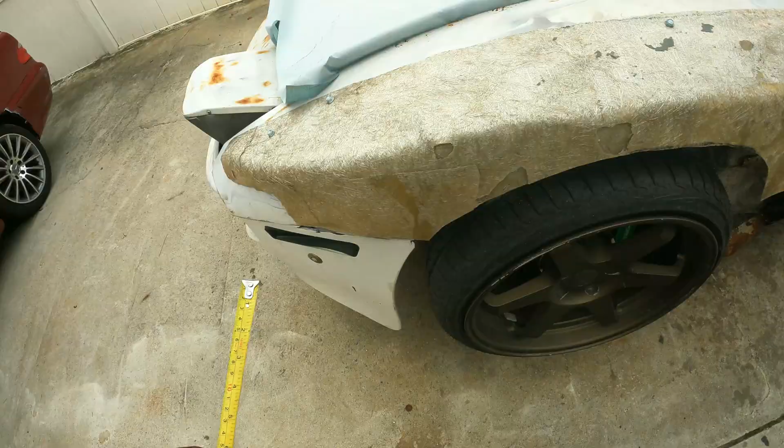My body kit more or less goes along with the dimensions of the car. Gotta find a piece where I can bounce off of here, but it's more or less not too wide. Okay, here we go - it's about 2 inches off from the body.

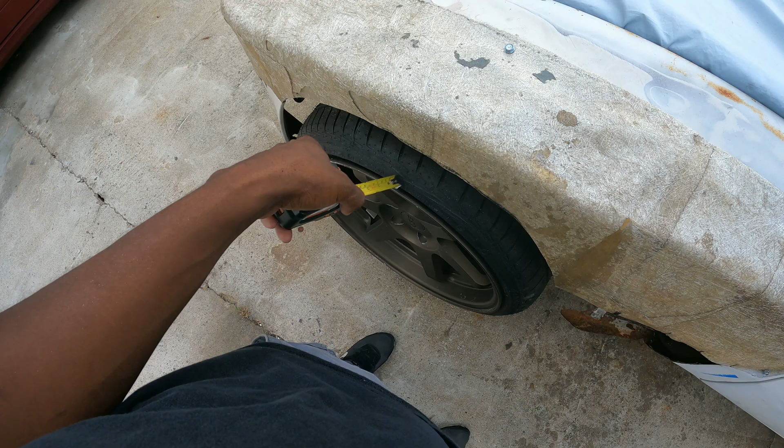Now that I know that, this is basically the distance of how far the wheel pokes out. I want to make the wheel super flush, so we're going to measure how much farther it needs to go out - about another 3/4 of an inch. So 2 3/4 - 2 inches here, 2 3/4 here, and then we'll swoop it back.

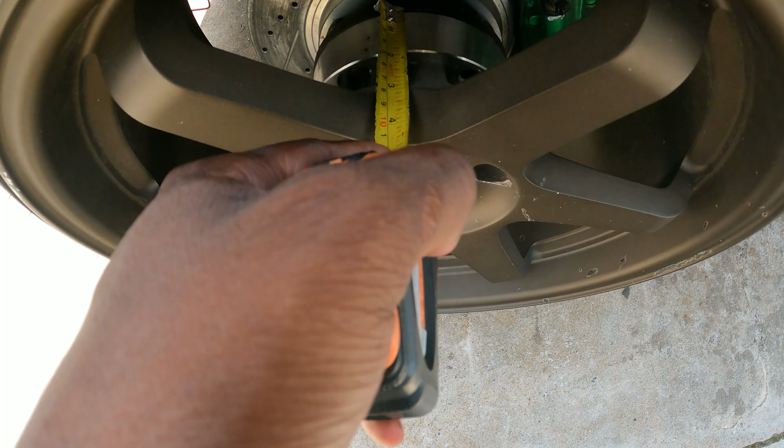Whatever that is, that doesn't matter. As you can see, we have a 1.5 inch spacer to get what we want with this wide body kit, and that's about all the measurements we need. Let's go ahead and take these measurements and throw them on the computer.

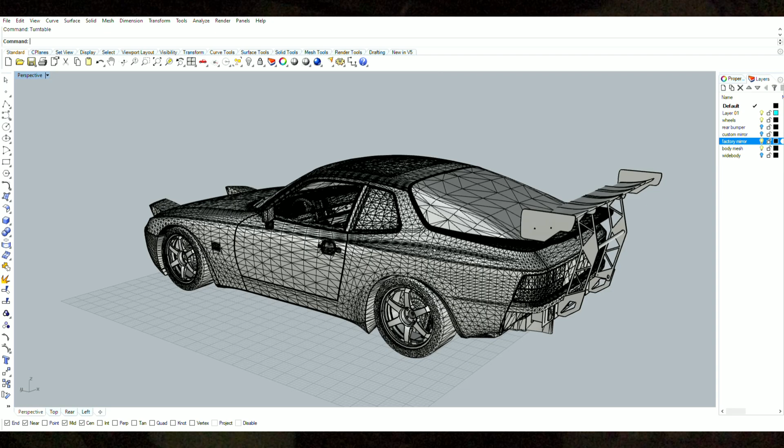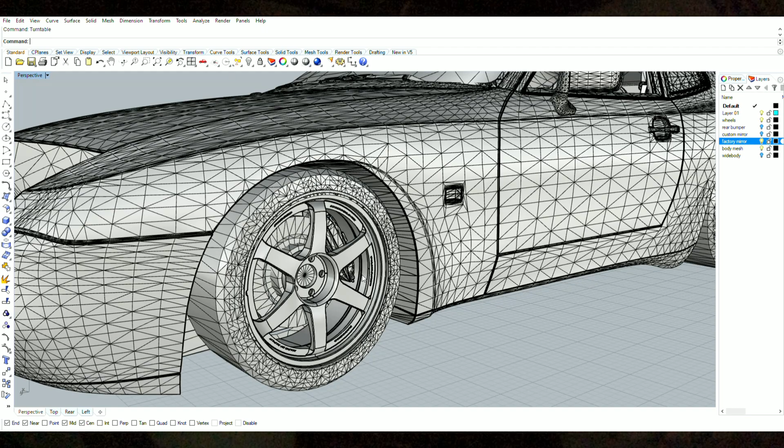All right guys, so we are here in my own little fantasy world. This is my 944 that I created on Rhinoceros 5. If you guys know about Rhinoceros, it's a pretty cool, very abstract 3D design software that allows you to do whatever you want. You can see this is my fantasy 944, all the way up to equipped with the TE37s here.

Everything was basically downloaded offline and I just went ham with it. Eventually I'll get a 3D scanner and start doing a bunch of other stuff, but for now all this stuff is just what we found online.

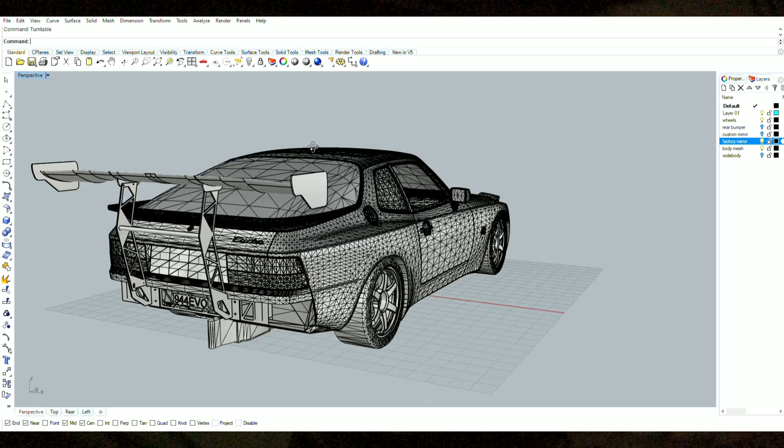So you can see we have a bunch of things that will eventually go on the 944. Like eventually we'll get real TEs. This is my rear bumper design, made it a long while ago. Kind of sticks the tranny out to symbolize what we're doing with that, but I'll eventually fix that. You can see we kind of touched the interior here.

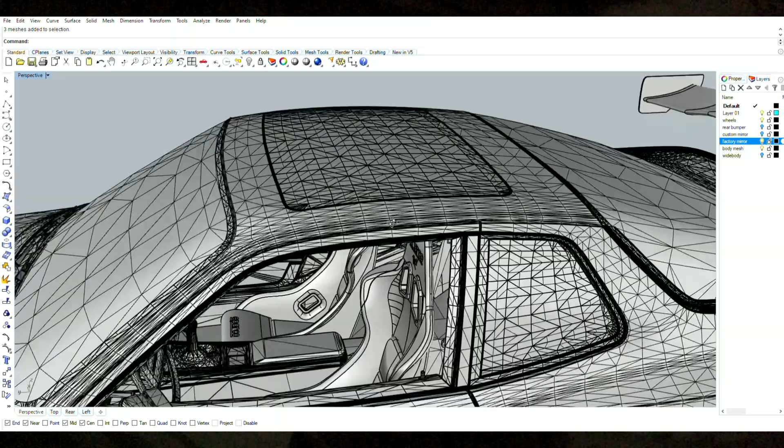Look at this, this thing is cool, guys. Now you can actually see why I wanted to design everything in 3D - it's actually super simple. I really like this kind of stuff.

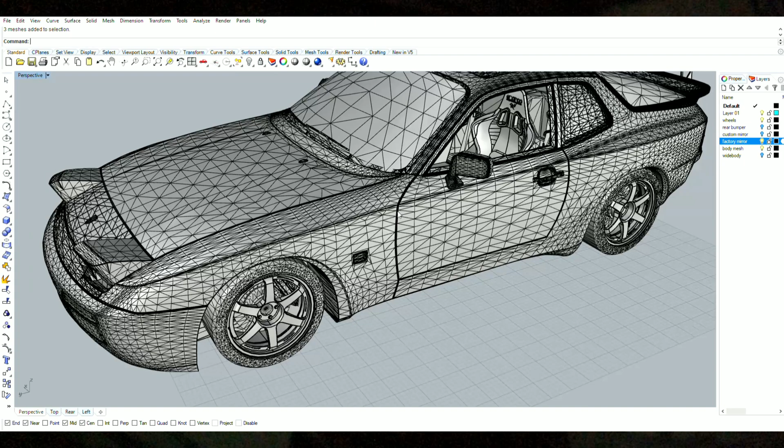So let's go ahead and jump right into it. As you can see, we can actually divide this car up into several pieces. You see, that's the mirror.

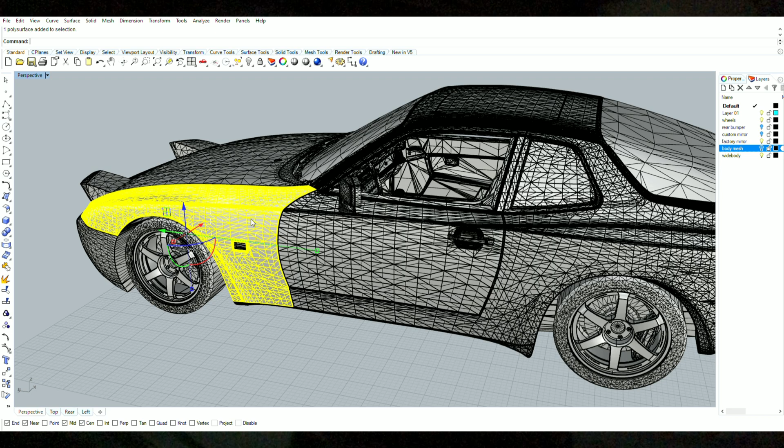Let's go ahead and turn on the wide body. We can turn off the body mesh, and now by turning off the body mesh we can separate these things into separate pieces. This actually helps us out a lot in terms of designing - now we can trim, cut, add, subtract, everything super simply.

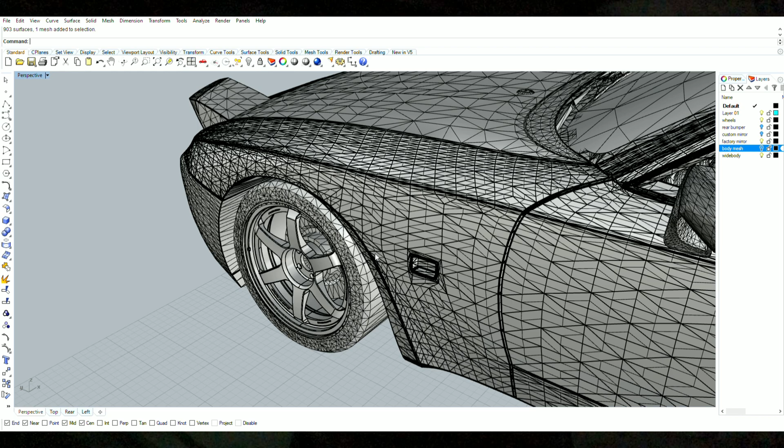The length may not be proper, the width might not be proper, but everything was scaled uniformly, so hopefully we're just going to go off of that. If anything, I'll take more measurements, and after we 3D print the wide body, we'll definitely be able to see if it fits or not.

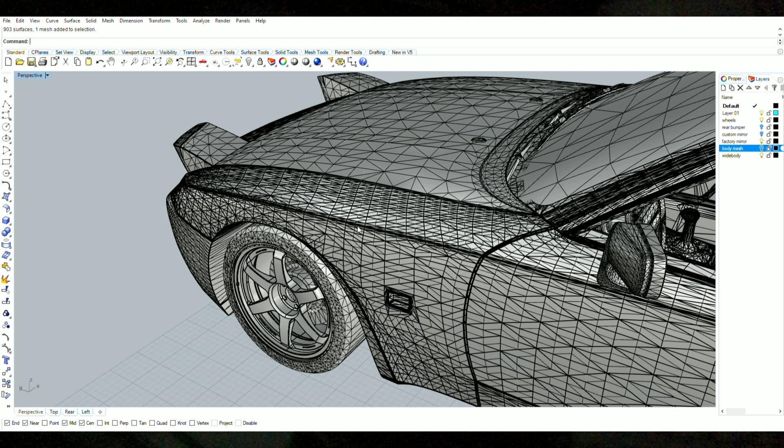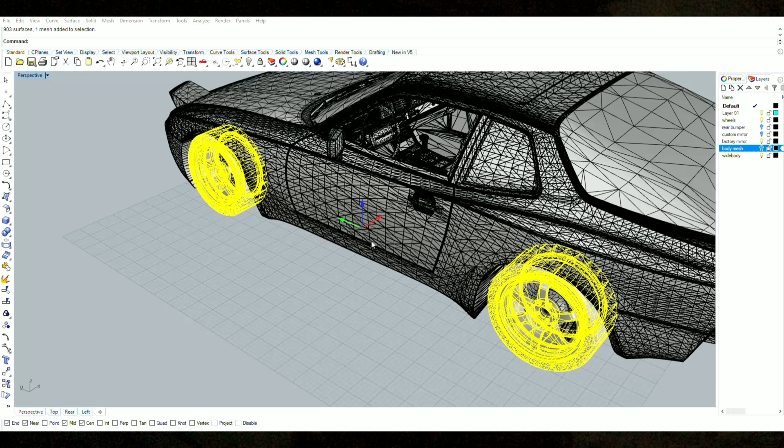That being said, we have 1.5 inch spacers on our TE37s, so let's go ahead and grab both of them and minus them 1.5 of an inch, and that gives us our little poke.

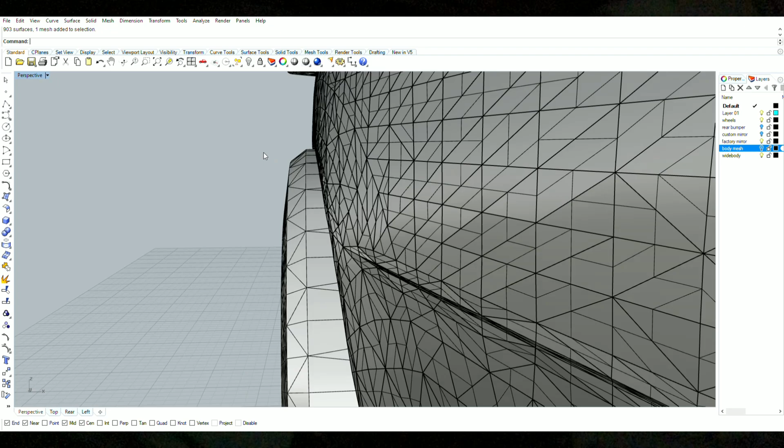Now, if you guys remember, probably like a year ago when I made my first video of slamming this car on my yellow speed coilovers, that's about how it looked on my 10.5 inch rim on the back with, I think it's 265 tires here.

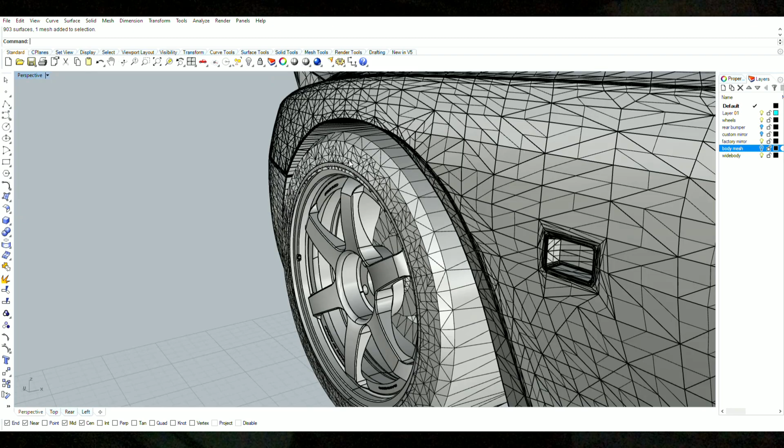Alright guys, now we can get to the styling of the body kit now that the measurements are all done.

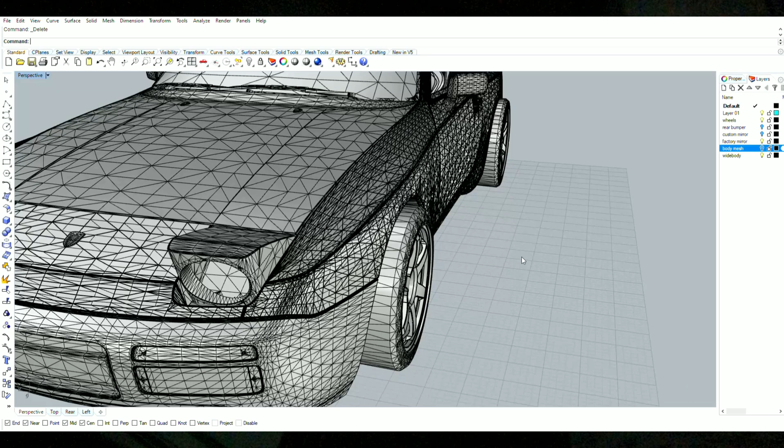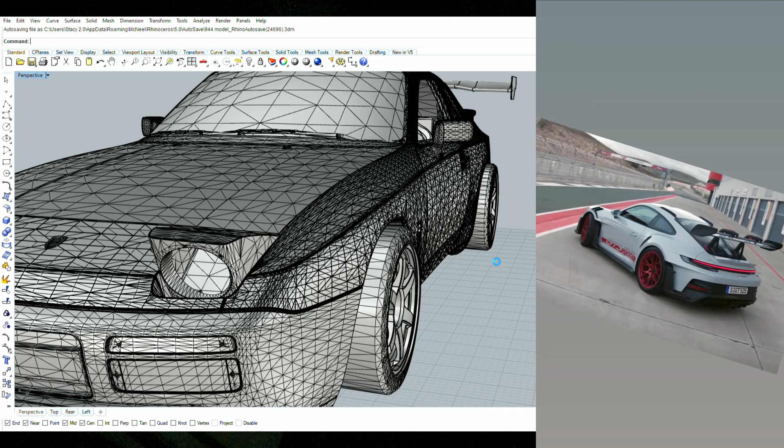For starters, I guess we can say my inspiration will definitely come from Porsche themselves. If you guys are Porsche lovers, you know the brand new GT3 RS came out for the 992, and that car just looks amazing. They actually just accentuated the curves of the OEM 992 and add a bit of flair to it with a bunch of fangs and a bunch of vents and whatnot. Just gave it that GT3 RS look.

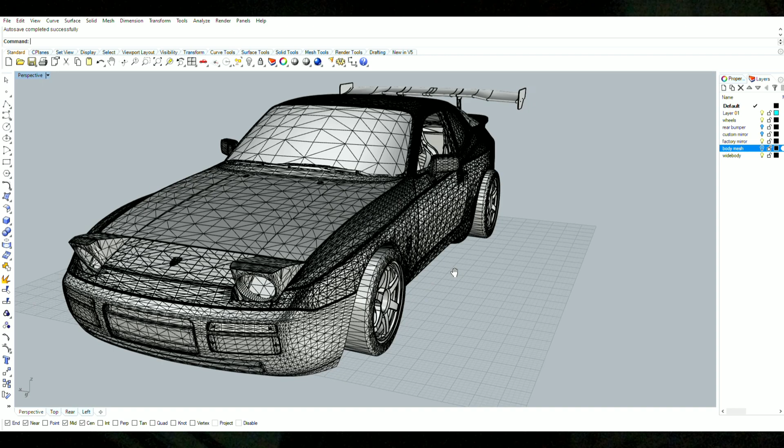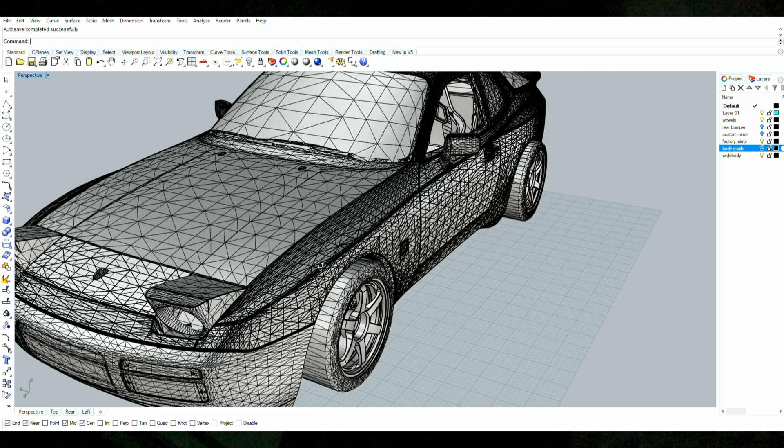So the goal of this body kit is to think, how would Porsche give the 944 the GT3 look? Obviously they would never give it the GT3 look, but we can just sit here and pretend to see what that actually might look like. So the goal of my body kit is to accentuate the curves just like Porsche and add a bunch of vents and make it look very track oriented, kind of hill climb, kind of style. You guys understand, I hope you guys understand.

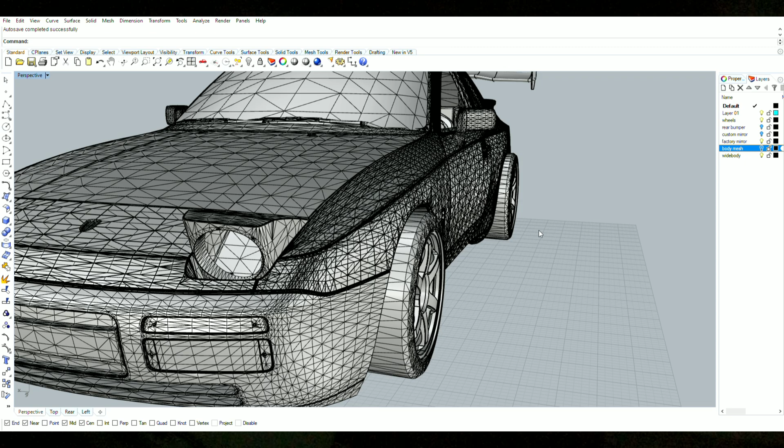Alright, so you guys have to bear with me here. I'm not very good at explaining my ideas while designing at the same time. I mostly just go and just do, basically. That's more or less what I am, mostly just a doer. And yeah, I guess you guys will see after I'm finished.

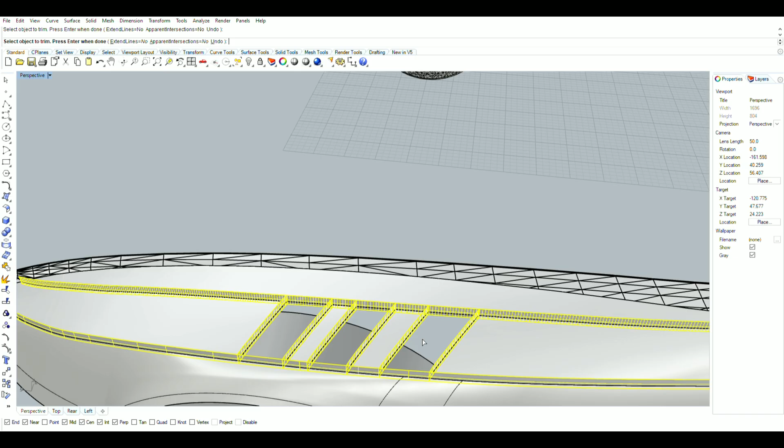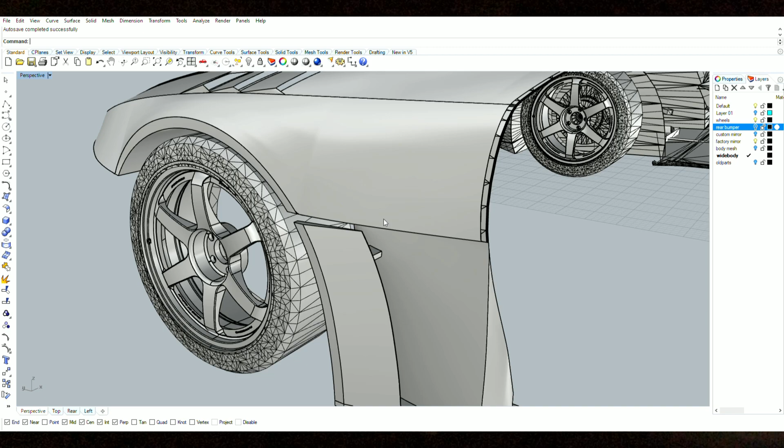Alright guys, I'm back again after that long break, but we finally have a fender. And man, is she going to be wide. So you can see, heavily inspired by the RS here. Giant vent with our turn signal kind of holder thing. The whole top of the vent ties the body together. Nice little side skirt, we're going to extend that on the rest of the car over here.

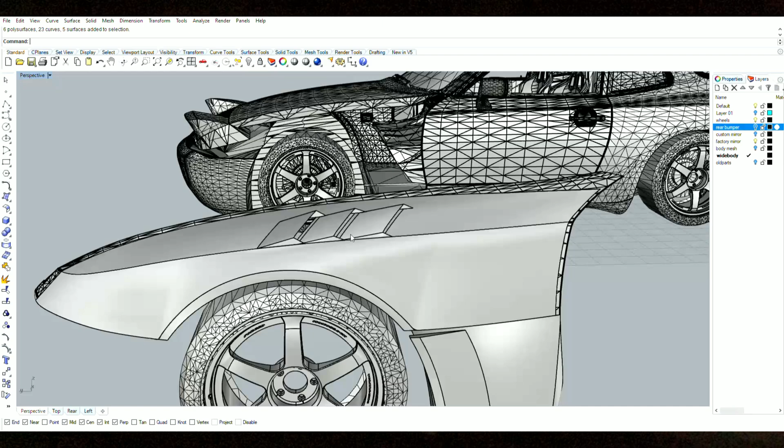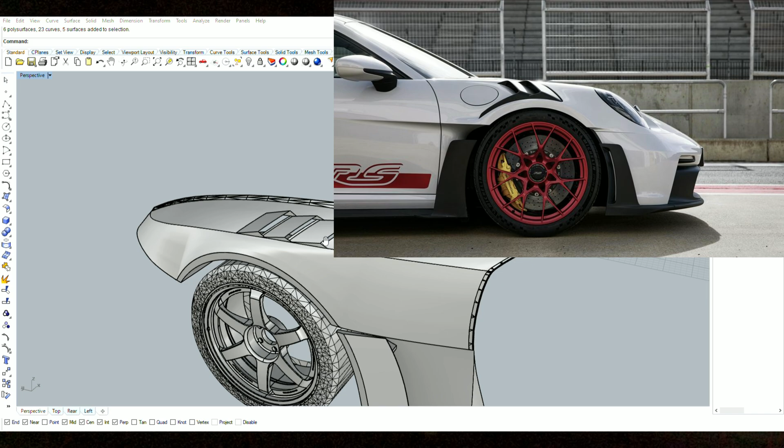And then we have a nice swooping fender with 3 vents. I didn't really want to do the whole how they swoop it down kind of fender thing. Let's see if I can find a picture here. It's not too hard to do, but I feel like because the body of the 992 is a lot more curvy than the 944, it didn't feel like it would work.

So we decided to actually just do these instead. Still, they kind of look like them, still inspired by it, so they kind of look like them. And they just don't have the curve down towards this vent right here, which is completely fine. I'm fine with that.

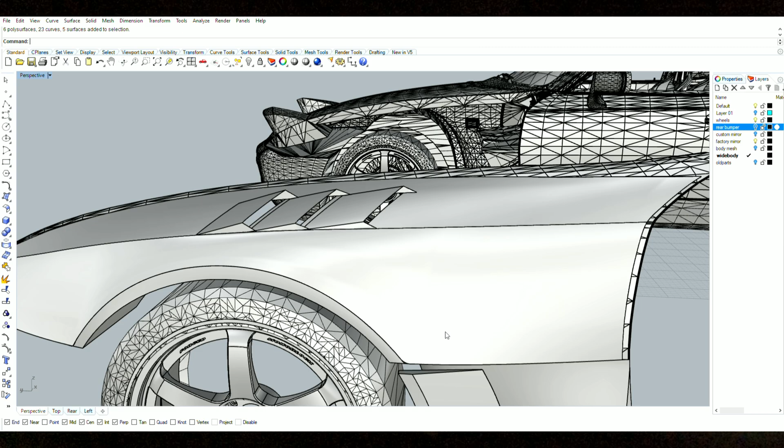So you can see we have the vent right here in front of the wheel, slightly ahead of the wheel to get the negative airspace out of here, that high speed air going over the tire. Give it a nice little spot to breathe out.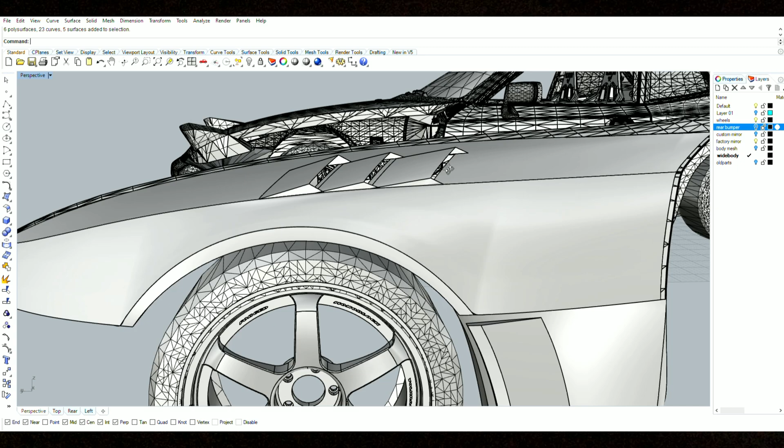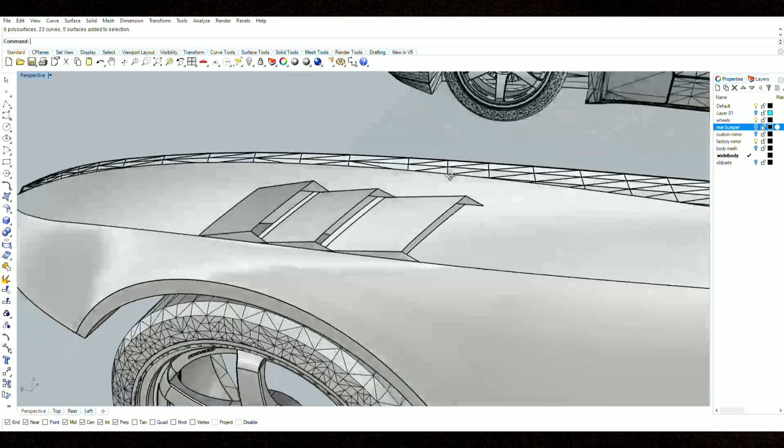And on top of that, this front vent is higher than the rest of them also to create more downforce. So this will create a negative air kind of up swoop, and then the rest of them just bleed out air. So that's exactly the thing behind these vents and this fender. And you can see we have our own fender arch well to keep all of this in. Let's go ahead and put this on the car now.

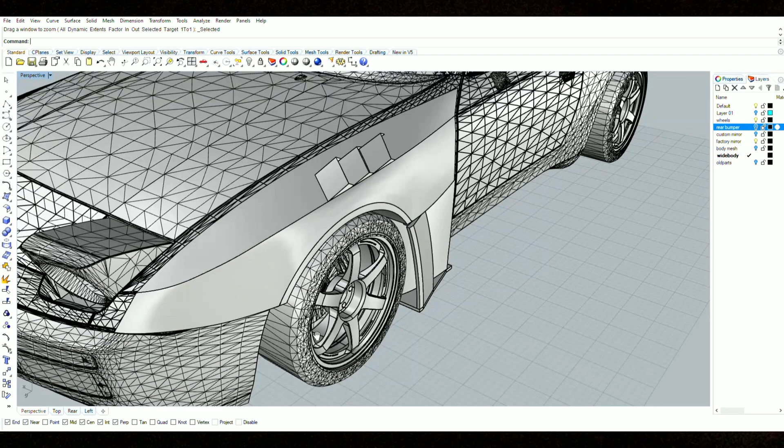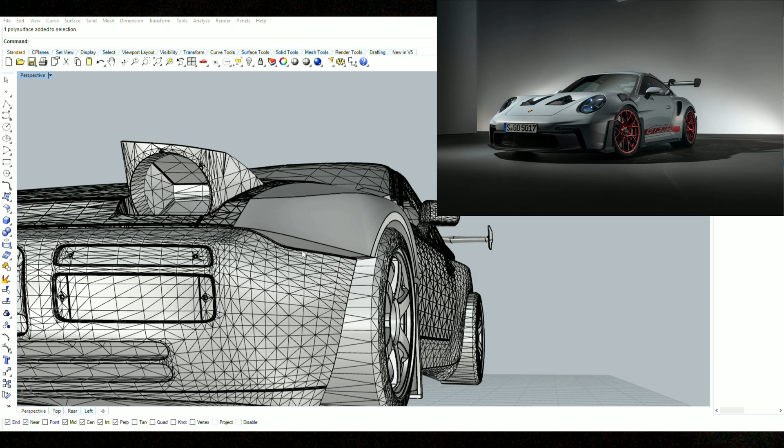It's crazy. So it kind of looks like we pulled out the body straight to match the pictures here, let me see if I can find a good one. This one looks like it matches, you can see that we pulled it out. Except we did it a little bit more aggressively for the 944, just to give it that more pizzazz look.

All the way down to the side fenders, that's actually pretty nice. The side of the fender with this giant vent, you see the exposed wheel right here. I like it, I like it a lot.

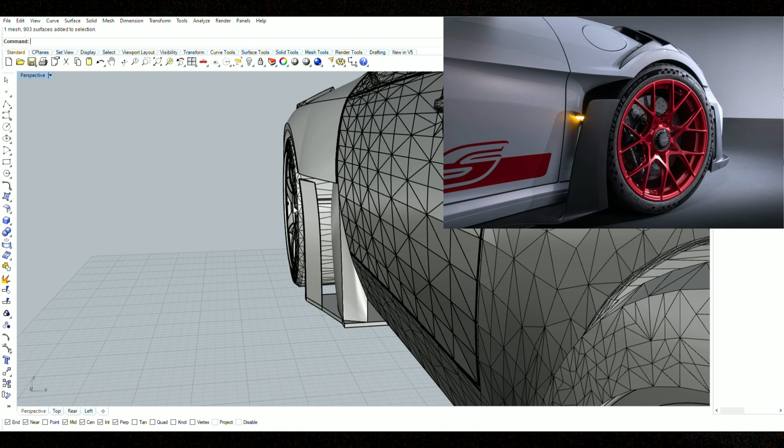So two more things to work on, then we could just mirror it off to the other side. Can't wait to get this car finished, it looks amazing. So we have to finish up the side skirt, we're going to pull that all the way.

Oh yeah, by the way, you guys can see we did bring it down a lot, kind of to mimic how my car is. If anything, I can raise my car up, but it is about 2 inches off the floor now.

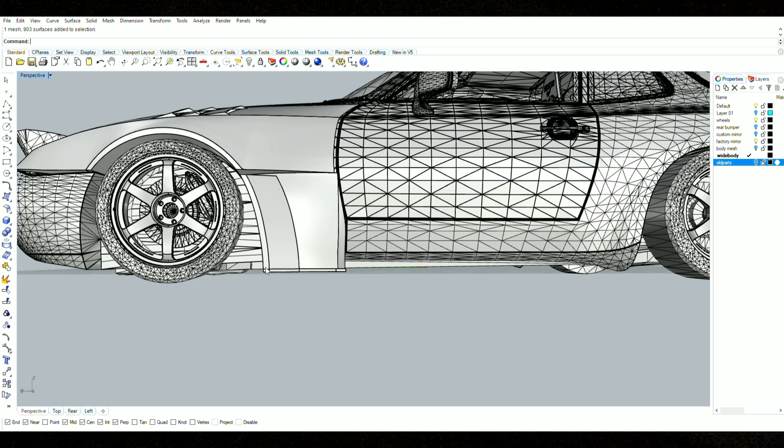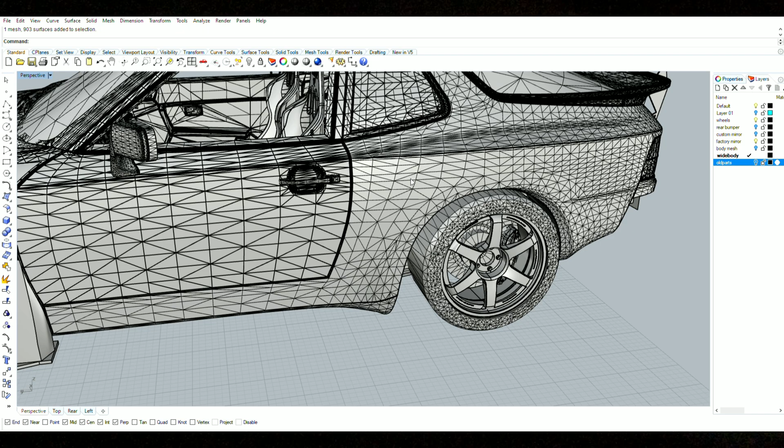So that's not too bad. You can see where the stock round body stops right here, and then the side skirt's lower to give it that lower to the ground look. So we're going to continue that all the way through, and then we're going to work on the rear fender. I guess we should work on the rear fender first and then connect it both with the side skirts.

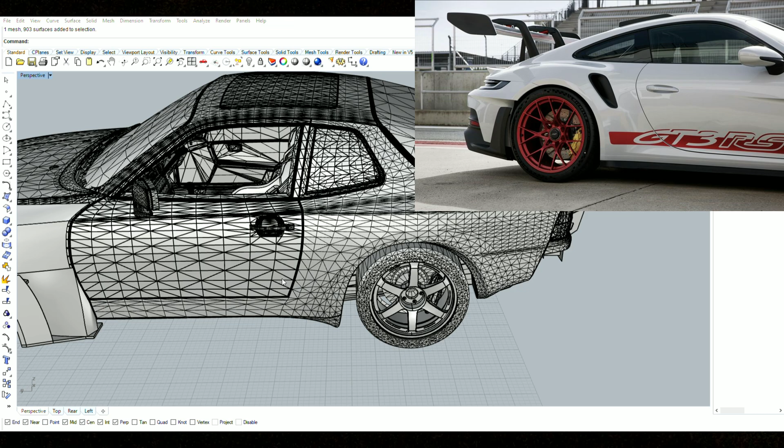I might actually make this vent a lot larger just for the look of it. And then we're gonna add another rear slat right here, so that's gonna be very, very cool. We're not going to show the process simply because I know this video is going to be super long, so just going to snap my fingers and the vent is going to be finished.

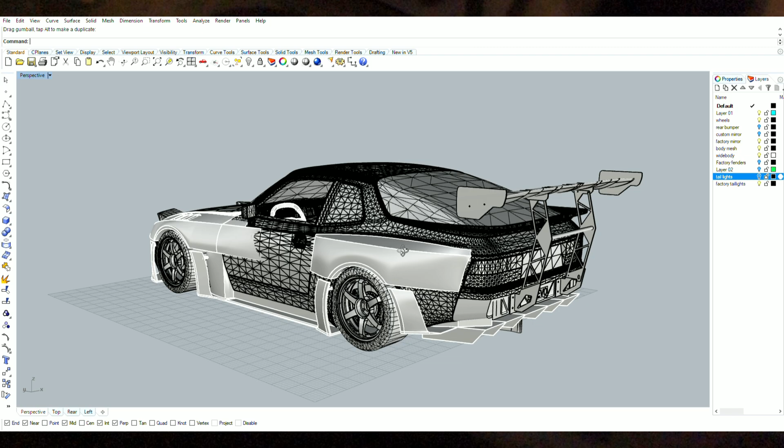Alright guys, here we are back with the rear, and look at this thing. I think this thing looks so amazing. You can see we went with the same design as the front half, pulled the fenders, make it look more archy.

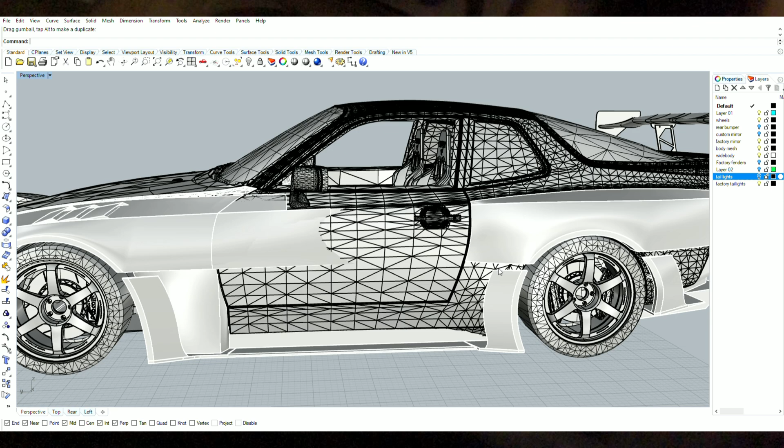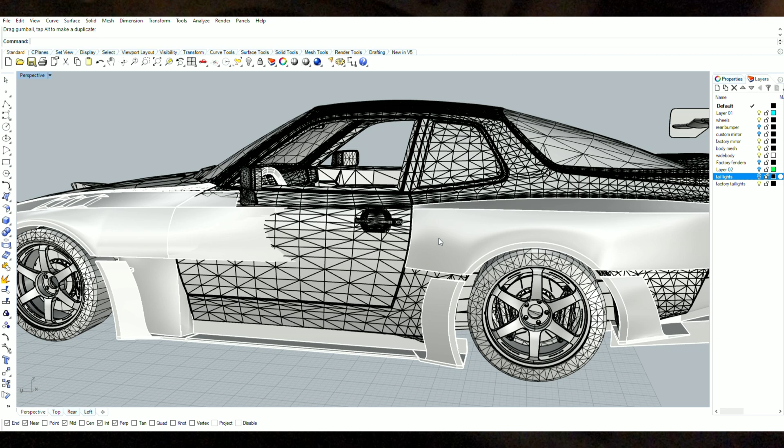And then for the back half, instead of just making this all the way down like how the true GT3 RS is, I felt like we should actually split it open and allow all the brake cooling and whatnot. So I honestly think it's cool. I didn't want to put the little vent here because there's no engine back here in the 944, so I decided to just do my own little thing. I think you guys will like it, honestly.

I think it's pretty cool. Continue with that, added the rear slat here, and then just finish it all off with a sharp looking diffuser. So this honestly came out really nicely.

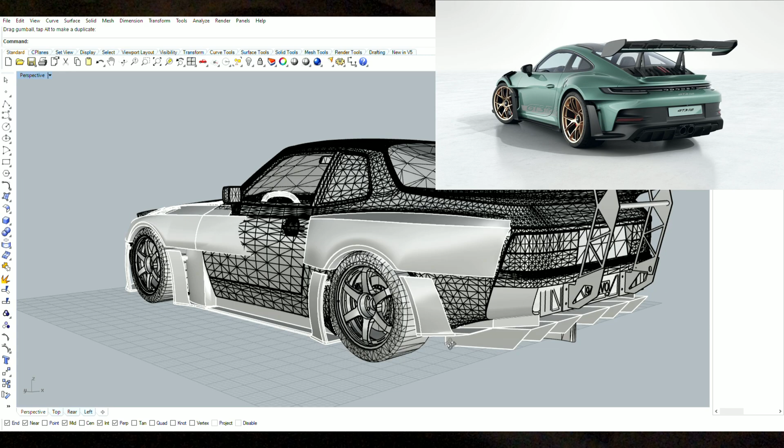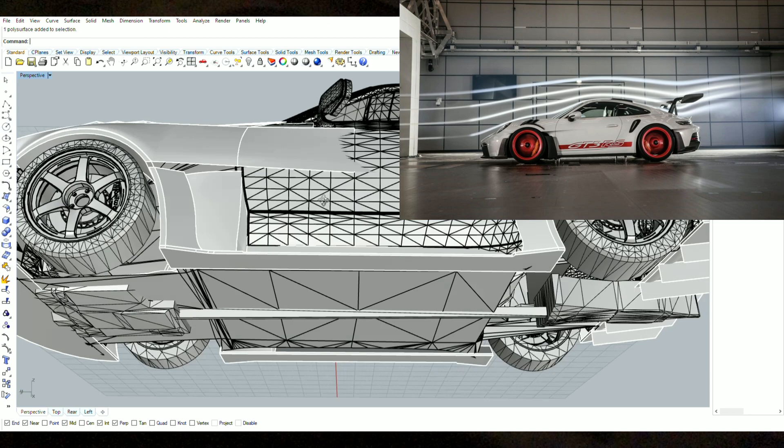Oh yeah, I also went back to the front half and added this door card right here, just like on the GT3 RS, they actually have a new door design because it pulls out and whatnot. So this is more or less the same. You can see it extends off into the door, and I further pulled the wide body kit out as much as I could. Don't want to make it look comical here.

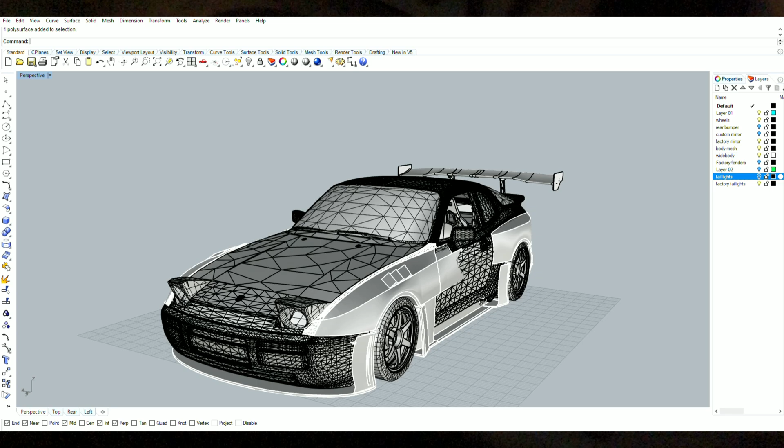So that's basically that, let's just take a shot. Look at that, this thing just looks amazing. Honestly, I'm really happy on how this kit came out.

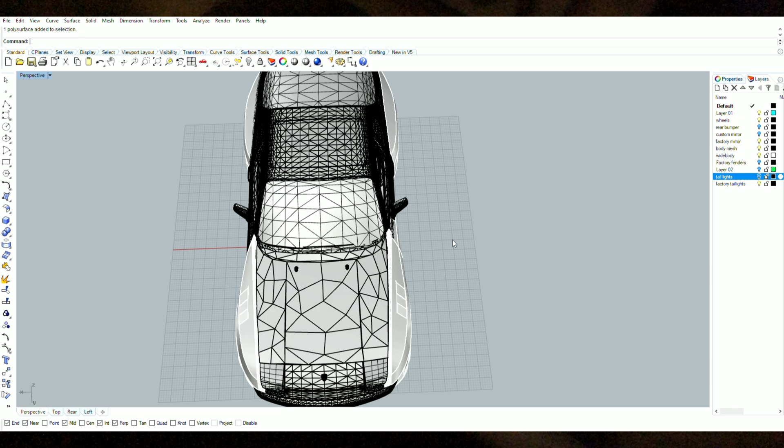This is the side without the door cards, you can see the differences. The not so wide fender versus the extra wider fender. This side actually looks like more of a Coke bottle shape, and the driver's side, you can see it looks a lot more aerodynamic, more sleek. This side just looks like it's missing something. So glad we actually ended up going with the added door card.

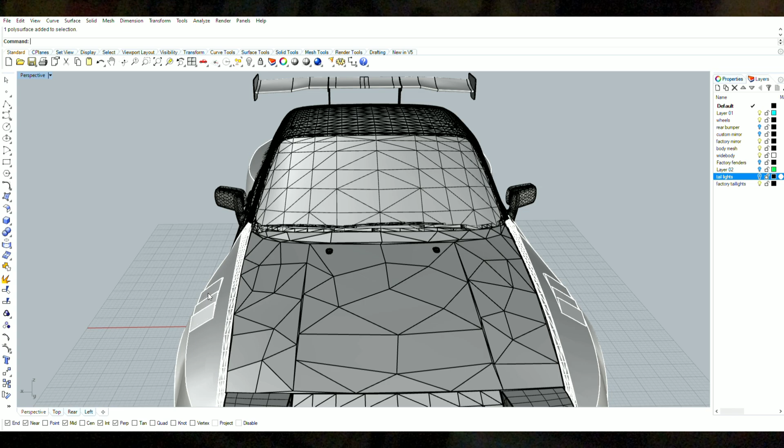So yeah, that's essentially how it looked before. We also added a little bit more details, we went ahead and designed this little light for the turn signal here. I think it'd be pretty cool.

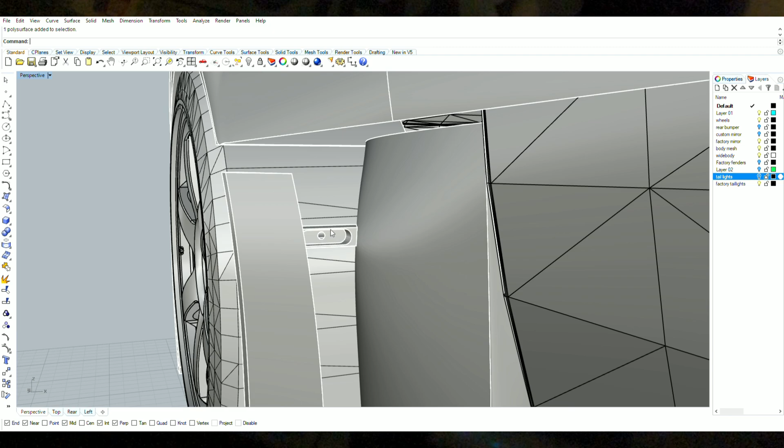I actually bought a set of small motorcycle turn signals, and basically gonna chop it up and fit it inside here, so that's gonna be cool. I was thinking about doing the same for the front, but I didn't want to make it look too cheesy, so I just decided to make it a straight slat with aerodynamics and whatnot.

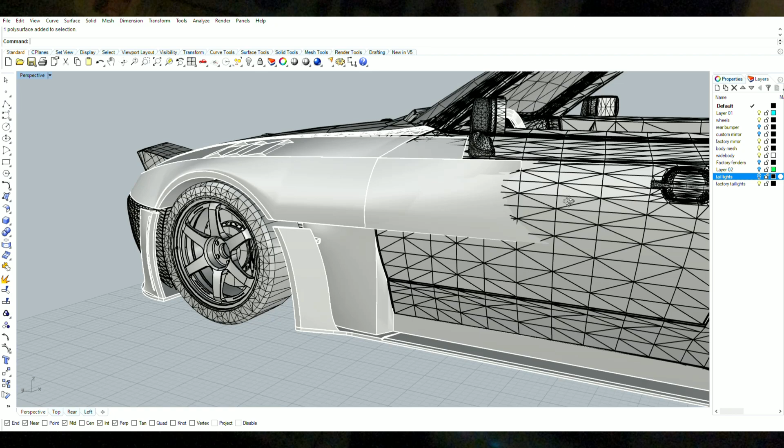All of the slats actually are pointed towards the front half of the car, you see it's flat here and pointed back half. Damn, this car just looks amazing. You can see all of that, like just the rear presence of this car. Like jeez, I can't wait.

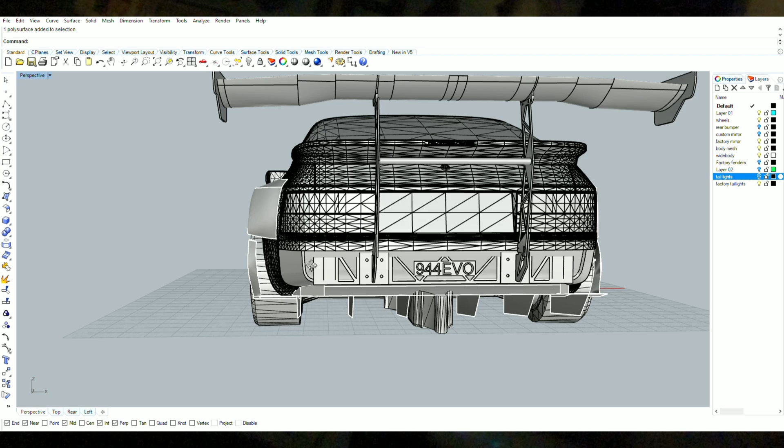So the next step, we're going to start to 3D print these body kits. Honestly, I think this is gonna be like definitely a couple rolls of filament all here, what I'm looking at. So not too bad.

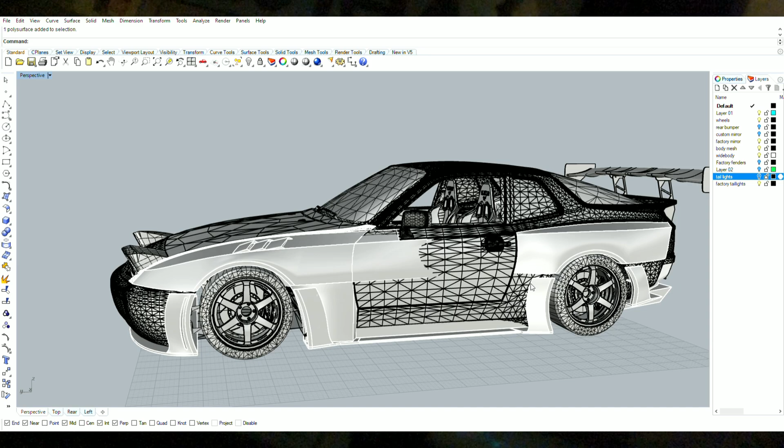But yeah, that's really about it guys. I know this wasn't the most entertaining video in terms of me actually physically doing something, but we're making strides towards our final goal.